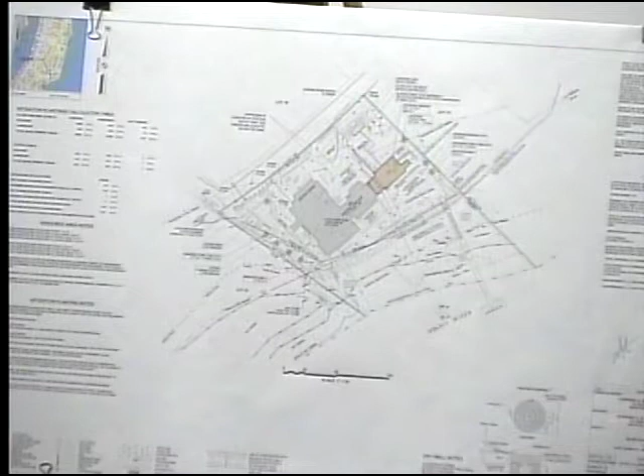Some of you might be familiar with this project. It's right on Waquoit Bay on the east side of Seapit Road Peninsula there. We were in front of the commission in 2014, late 2014, to do some improvements on the property.

That's when Mr. Sherman purchased this property. At that time, the prior owner had a fire pit built out on the front bluff without the benefit of a permit. Mr. Sherman came on board and had all of that stuff removed, bringing the project into compliance, and then we went through the process of doing some additions to the house. We received a certificate of compliance, I believe it was early 2015.

So what the need is now is he would like to have an addition on the side of this house. The addition is shown on your plans in an orange color. It would be built on a typical foundation. The only thing unique about this addition is there's a second floor connection to it, so you don't actually walk on the ground. There'll still be an open air walkway underneath this addition where it connects to the house. There's an existing retaining wall in that general area that's going to be relocated, and we'll regrade around here.

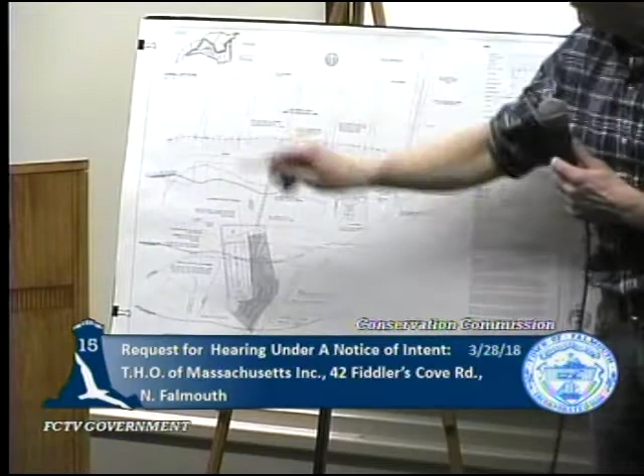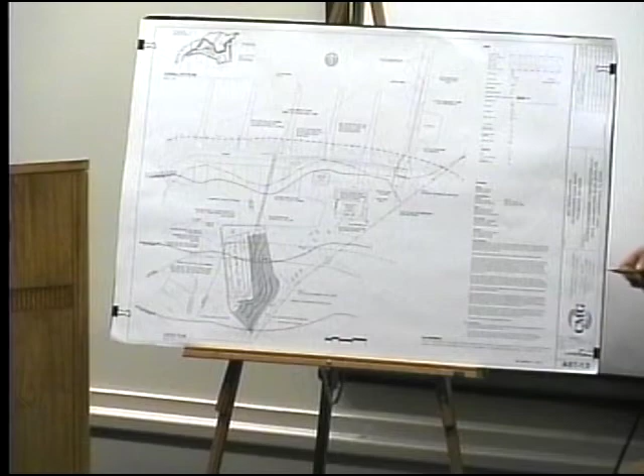So there's an existing fuel dock over at the marina, on the extreme east side of the marina property. This is the overall marina property. I show on the little inset where the tank is proposed to go, and we blew that area up to 1 inch equals 10 feet. We've got our floating docks here, this easternmost dock is the fuel dock, and they've got a parking lot right here. You can see our mean high water line and where we calculated the coastal bank.

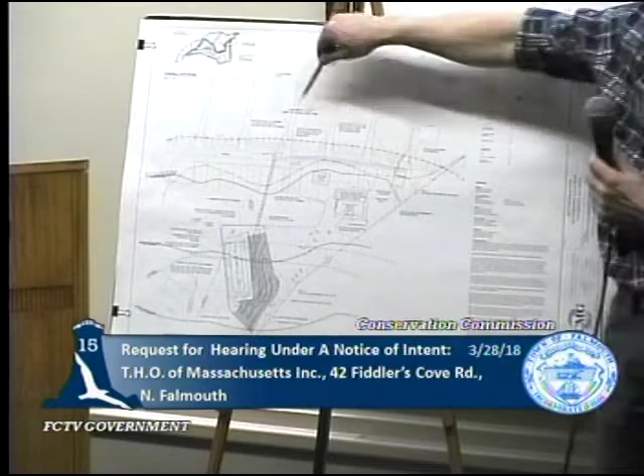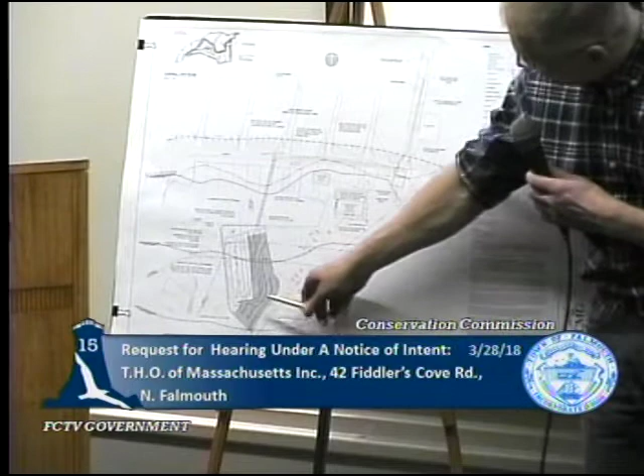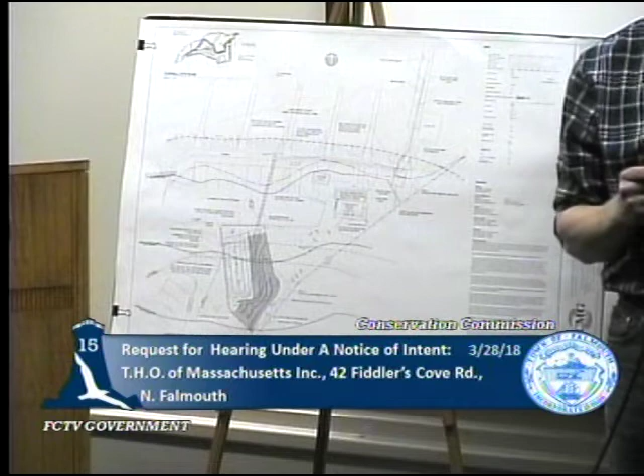And under ocean, we also have shellfish, and we've got land subject to coastal storm flowage. You can see on the plan, dashed lines show the two 6,000-gallon tanks to be removed. Those are underground tanks - it looks like sometime in the past they excavated a little and covered them up, reworking the topography to get the tanks in. I think it was about 1988.

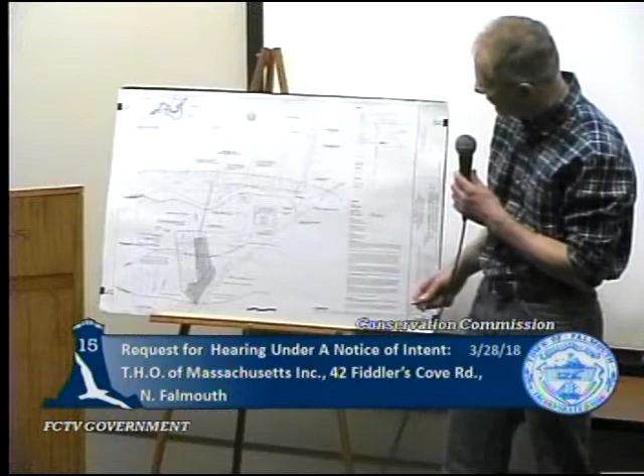So the plan is to replace the aging underground tanks, which currently have 6,000 gallons of gasoline and 6,000 gallons of diesel, and install a single double-wall, fire-rated, above-ground tank split into 2 compartments - 6,000 for diesel, 6,000 for gasoline. They'll still have the same product mix they have currently.

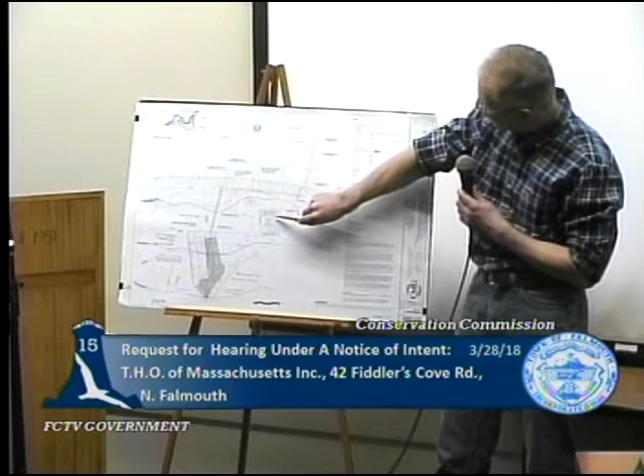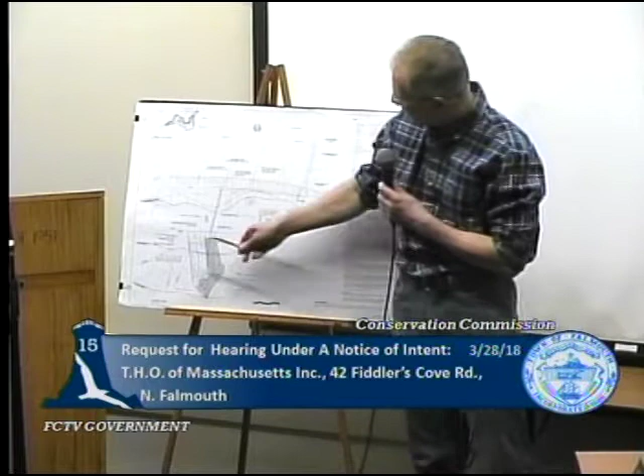Currently the piping runs underneath the parking lot, then under their boardwalk along the top of the bank to the fuel shed, then transitions to under-dock piping. Our plan is to put new piping across the parking lot, tying into the existing double-wall fiberglass pipe. The pipe under the dock is good - double-wall fiberglass - and perfectly good to remain.

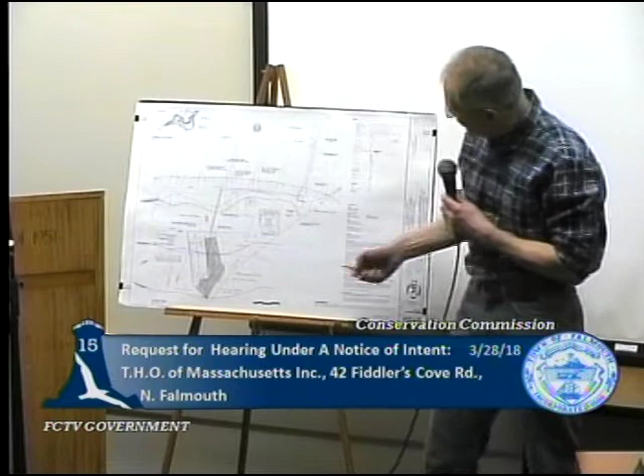Basically, we're going to remove the existing underground tanks and fill in the hole that's created, giving about a 3-to-1, in some places 2-to-1, slope down. We have a flat area where we can install the new tank on a concrete pad.

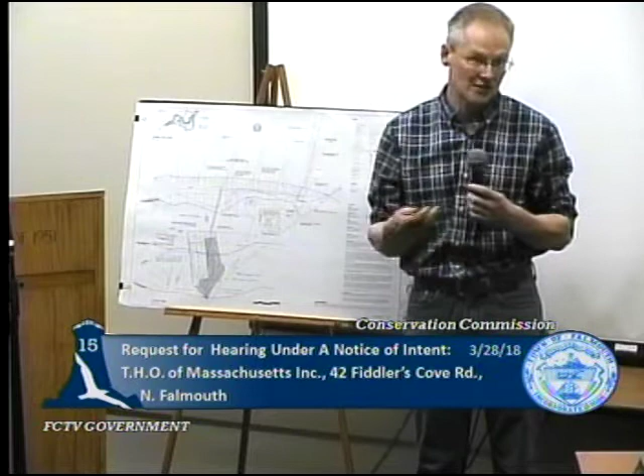The tank will have continuous electronic monitoring, spill containment, and overfill protection. It will also need a permit from the State Fire Marshal's office, so they'll review it as well. It's protected by bollards, and it's basically a state-of-the-art installation that they're doing nationwide at these marinas. They consider the underground tanks to be a problem and a liability, and feel more comfortable with above-ground tanks.

So I'll answer any questions if you have any. Thank you very much. Okay, Jen, do you have any? No, Madam Chairman, I've met with the Brewers Marina representative multiple times on this project, so I'm fine. All my questions. Great. Mark, you want to start? I have no comments. No comment.

Peter? Are there any trees that have to be cut down? No, actually there aren't. I did go out and identify any tree bigger than 5.5 inches, and I'll have to work with the contractor on the ones up here. They're close, but we're not really changing the grade. If we slide the tanks out down slope and backfill promptly, I think we can keep them all, even though some of them maybe aren't the best specimens, but I'd rather not take them down. Okay, Steve? No questions.

Jamie? Betsy? Would be a big improvement.

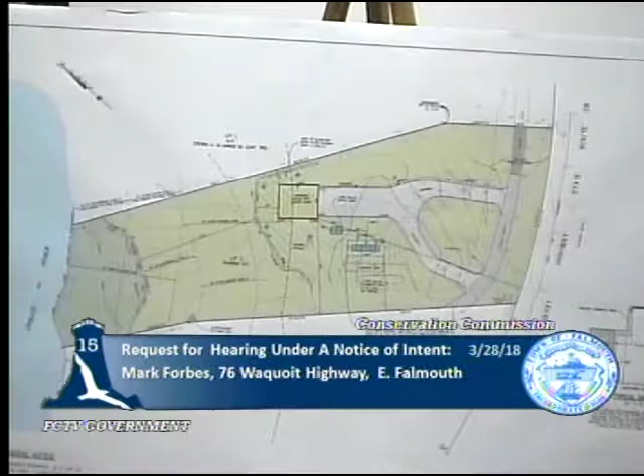Hello, Mike. Betsy, this one goes in with the dredging one. Oh yeah, I was wondering why they were talking about dredging. Yes, thanks - where are we? Thank you, Waquoit Highway, 76 Waquoit.

Good evening, Madam Chairman, members of the commission. Mike Porcelli, Falmouth Engineering, representing the applicant, Mark Forbes. Mr. and Mrs. Forbes are in the audience tonight - if there are any questions specifically for them, or they may want to comment.

I do know one thing before I proceed - at least one of you had difficulty getting to the site. I too had difficulty when I first got retained to find the site, so we tried to put up signage and give directions to make it easy, but it's a tough spot. A sign right on Route 28 would have been helpful. I'm not certain you're allowed to do that in this circumstance, but that's what I missed. We did put up a sign - if you got to Whistler's Way, you went too far. That was helpful, at least you didn't go all the way to Mashpee. Sorry, I hope you were able to find it. Yes.

So the Forbeses have applied for permission to build a single-family dwelling on Lot 2, which has frontage on Childs River, so the wetland resources include the river, land subject to tidal action, and a coastal bank, shown here in green. The top of the bank coincides with two other important boundaries: the flood hazard zone A10 boundary, and the boundary of the ACEC, Area of Critical Environmental Concern. So from here towards the river is ACEC, coastal bank, and flood zone.

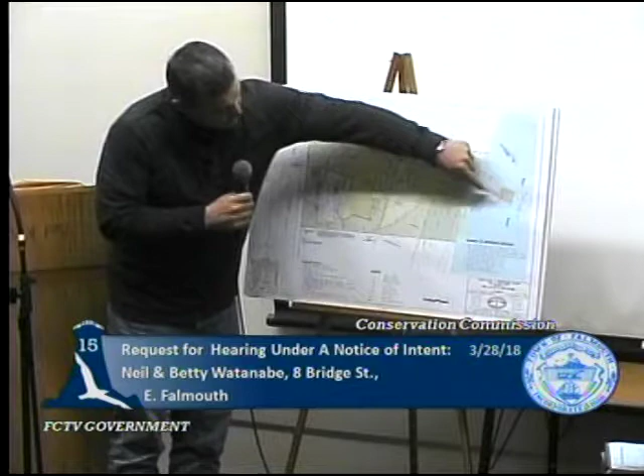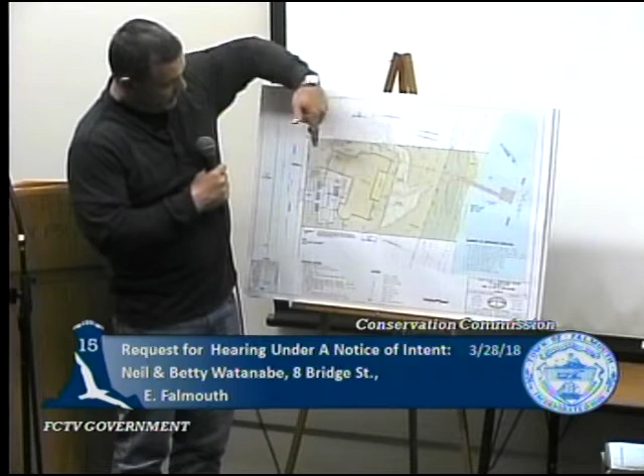This property is located at 8 Bridge Street. It has water frontage on Green Pond, on the western shore. There's an existing licensed dock on the property, and an existing single-family dwelling in the same location as the proposed dwelling, with its driveway, septic system, and typical cleared and landscaped areas you'd find in a home in this area.

The wetland resources of note include salt marsh. I guess I should start with the land under the ocean, and land subject to tidal action. There's a strip of salt marsh, there's a coastal bank, and a portion of the property is in land subject to coastal storm flowage.

I believe effectively the entire lot is in land subject to coastal storm flowage, but there is a boundary of velocity zone from here, seaward, and from here, landward, is AE12, base flood elevation 12. We also show the 25-foot in parallel to the FEMA V zone, the Falmouth designated V zone.

We located the trees on the lot, the driveway. We submitted also with your package reduced copies of plans to try to make it easier to do a compare and contrast to the impervious surface calcs, pre and post. There is a summary of the notes outlining that on the plan.

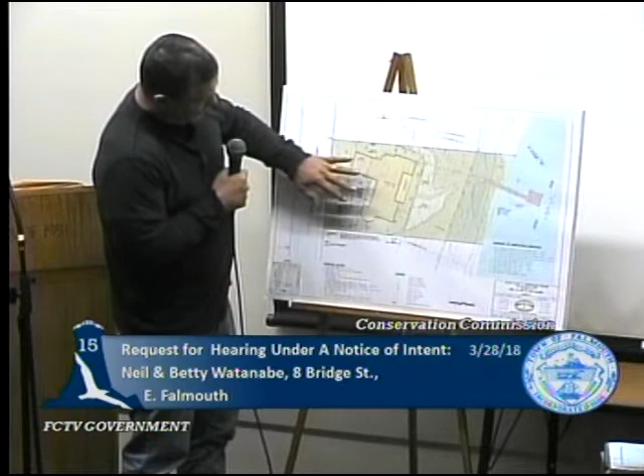The house has been designed very specifically with FWR 10.18 in mind. I guess since 2008, when the rules took effect, we've probably done dozens of projects like this, so we've all worked together on that and understand what they mean, what they say, and why they're good. The goal is to enhance buffers to wetland resources when they were altered prior to a prohibition against doing that, and if you make things bigger, you need to provide more mitigation planting at certain ratios that we all know, 3-to-1 and 2-to-1.

So with that all in mind, we very meticulously designed the house. We kind of worked backwards, if you will - we surveyed it, understood the areas available for planting, and it backed us into the size of the house that could be supported on this lot and, in our opinion, meet your regulations. So what you see is the culmination of that design work by Denise Spinoli and I, interfacing with Teresa to provide the enhanced buffer mitigation that is required.

So the areas between the house and the wetland resources are shown to have the required mitigation planting. If you look at the reduced copies and follow along in the notes, the net result is there were increases in the calculated ratios, so that the required mitigation for this project was 2,250 square feet, and we're proposing 2,310, or about 60 square feet in excess of the minimum requirement.